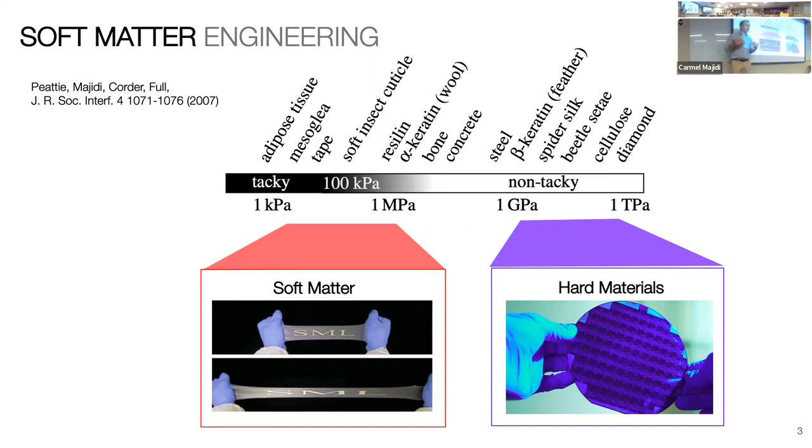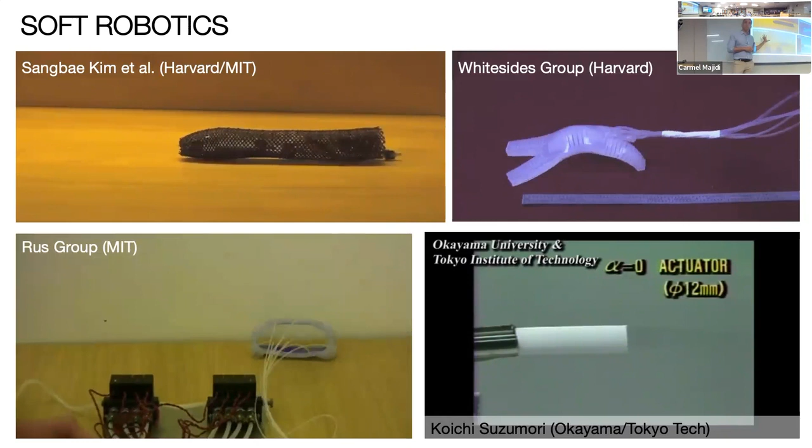So this is something that we generally think of as an important element of soft robotics. Ryan mentioned Rob Wood, who's really done a lot of really exciting work in this space, but there's plenty of others. Ryan himself has done a lot of really exciting research, and there's just been decades of work. Actually, you can go back to the 1950s and 1940s, and folks have been doing soft robotics work with soft materials, elastomers, using pneumatics, hydraulics. A lot of these concepts and material architectures actually in some ways predate a lot of the current practices and the field of robotics more generally. So a lot of rich history here, a lot of work to build on over the years.

And it's not just soft robotics. There's been also decades of research on all sorts of robust, deformable, skin-like electronics and sensors. Of course, Northwestern is the hotbed for a lot of this work. Really the gold standard in stretchable electronics is established here, with folks like John Rogers and Huang and others, with these more deterministic architectures using wavy and serpentine ultra thin film electronics, but also a lot of really exciting work with nanomaterials and soft composites.

I'll talk quite a bit about our work with using liquid metal, and then also with hydrogels. I'll touch on some of the efforts, not just with ionic hydrogels, but more recently electrically conductive hydrogels that expand the range of options for stretchy electronics and sensors.

And then tying into some of the strengths here at Northwestern, again, not just on the stretchable electronic side, but obviously on the haptics side as well. The work done at Colgate and others, really pioneering novel material architectures, material systems, and using those for haptics and human machine interaction. So this represents another really exciting area where there is that continued potential for soft materials engineering.

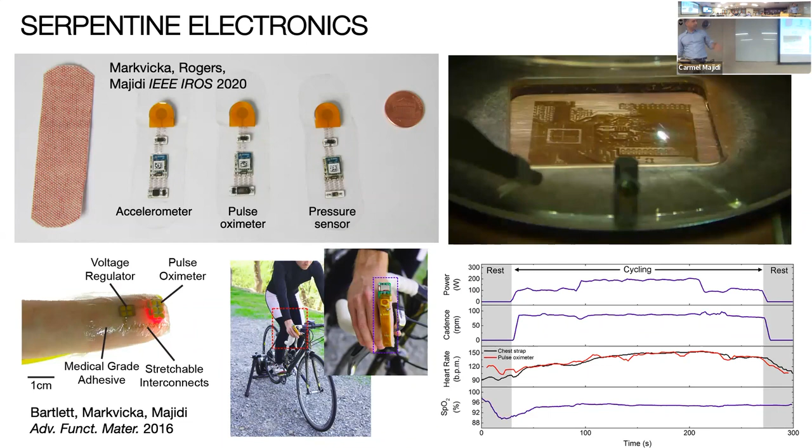In my lab, we just found that simple UV laser micromachining is good enough to create a lot of these same systems. Granted, at somewhat of a larger length scale, but still small enough that we can directly interface with pretty much any kind of surface microelectronic chips or sensing components that we need for different types of wearable applications. So this is just one case of a finger-mounted pulse oximetry chip in this video. Sorry, it's a little bit dark here.

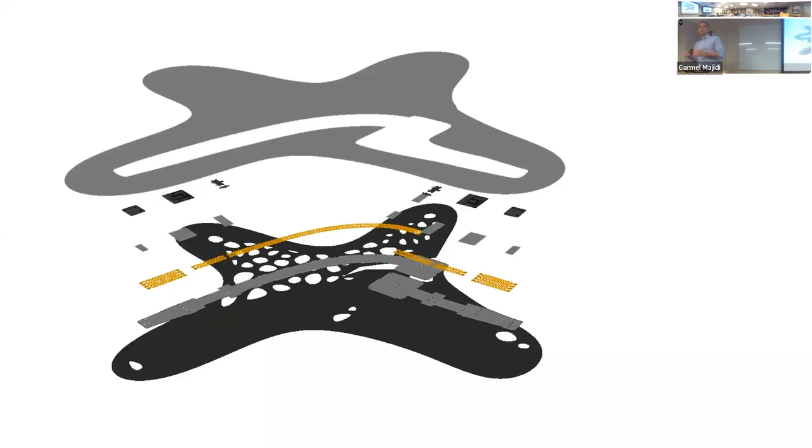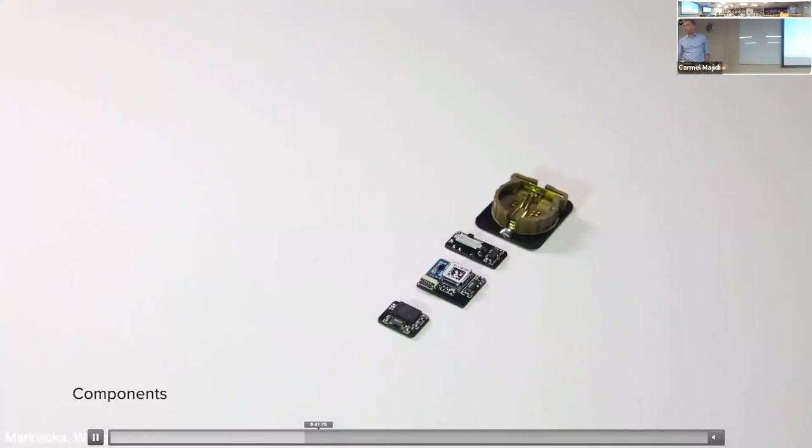But this is actually work quite a few years old now with Lining Yao in our HCI Institute, who developed a software interface to allow non-experts to go in and design some of these wireless sticker-like technologies that use these laser patterned serpentine interconnects to do multimodal sensing on the body. And so I'll skip ahead here in this video just in the interest of time. What we can see is that we can actually produce these using rapid prototyping techniques and create these customized stickers in under an hour.

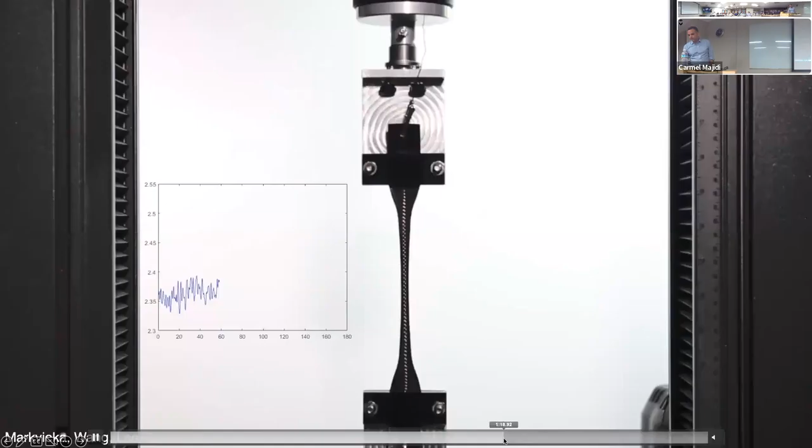And they're fully wireless. We can incorporate Bluetooth just like you would with any kind of standard IoT device or wearable. And this particular use case is a pair of IMUs, so you can do joint angle sensing. Maybe a little bit easier to see on that monitor than the projector, but the next clip just shows you just how robust and stretchy these serpentine interconnects are. So this is obviously well known, prior to us working on this. But what we show is just that, once you have a rapid prototyping method, you can achieve all sorts of different sensing modalities just using these surface mounted commercial chips. So acoustic sensing, IMUs, pulse oximetry, temperature, pretty much the works there.

So, very promising approach. Still, I'd say it represents the gold standard and probably the most mature approach to creating stretchable electronics. But one of the challenges, of course, is that, when we say deterministic, you actually have to engineer that patterning into these materials to get that stretchability, right? And so what these materials are lacking is that intrinsic compliance and deformability that you truly need if you want to have something that really matches the mechanical properties of soft biological tissue at all the different length scales, right? So I'm not going to get into all the downsides and challenges, at least for us practically working with these laser patterned electronics, but needless to say, there are cases where we want to shift to these other material systems.

So with these particle filled composites, again, this is another really rich area, fairly mature at this point, and over 100 years old. I mean, back to, actually, the turn of the last century. Folks were taking carbon black, carbon powder, filling it into rubber, achieving percolating networks that had electrical conductivity to get all sorts of soft rubbery conductors. And so if you use carbon black, the conductivity is not quite enough for digital circuitry, but it's enough if you want to have capacitive transducers or resistive transducers to do some basic, say, touch sensing. This is work we did with Jürgen Steimle and a few others years back on using these as little tactile interfaces.

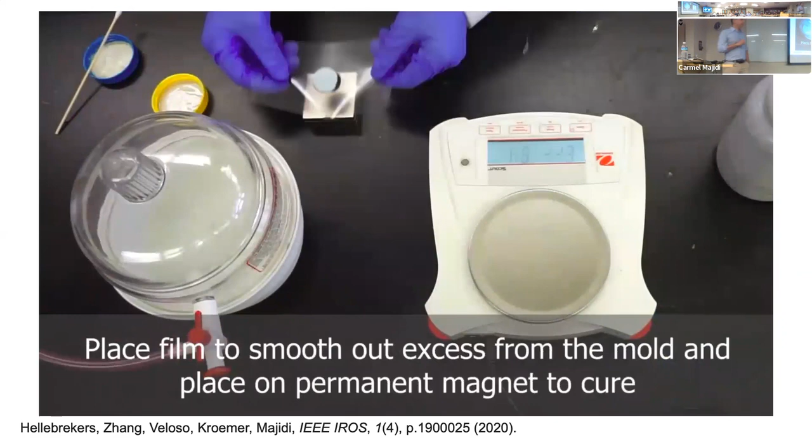So this is still ongoing. Tess has continued to work on this project. She's actually now at Meta AI, and I have another PhD student right now who's a Meta fellow who's continuing to work on this technology. This video here just shows you some really basic use cases of it.

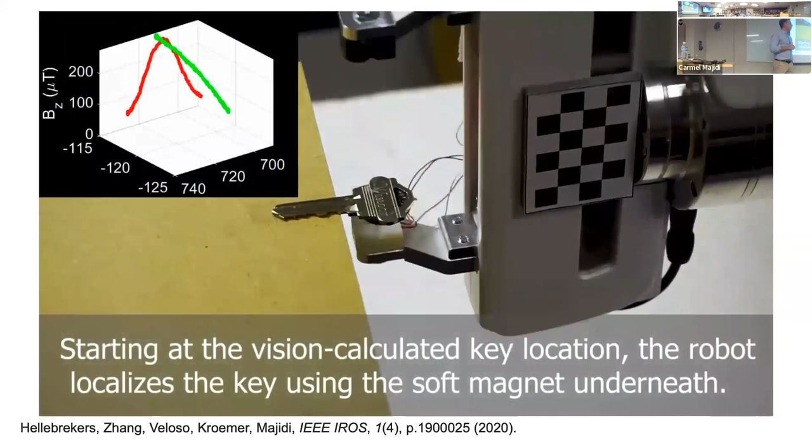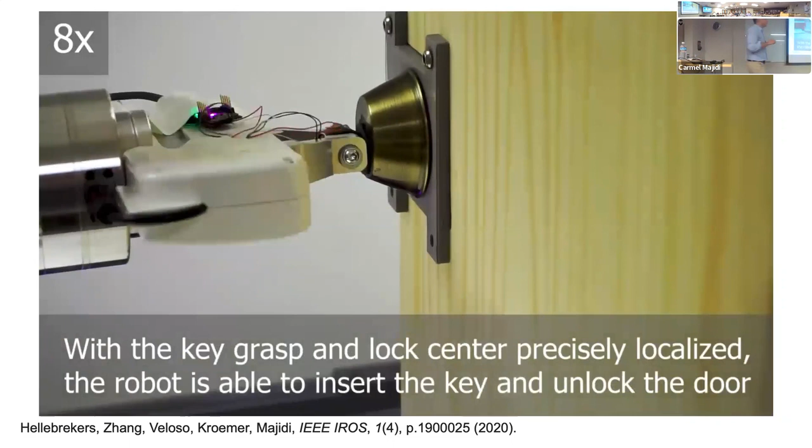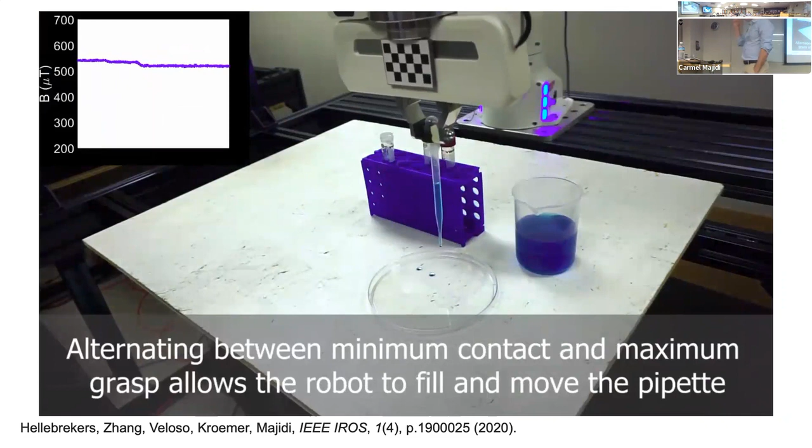What's actually interesting is, because it's kind of based on magnetic field, we can also use these sensors for proximity detection as well. So if you have the magnetometer, say, on the robot finger, and if you have this magnetic skin on the object that you're trying to interact with, then you can actually not just detect pressure during contact, but also detect the proximity as well.

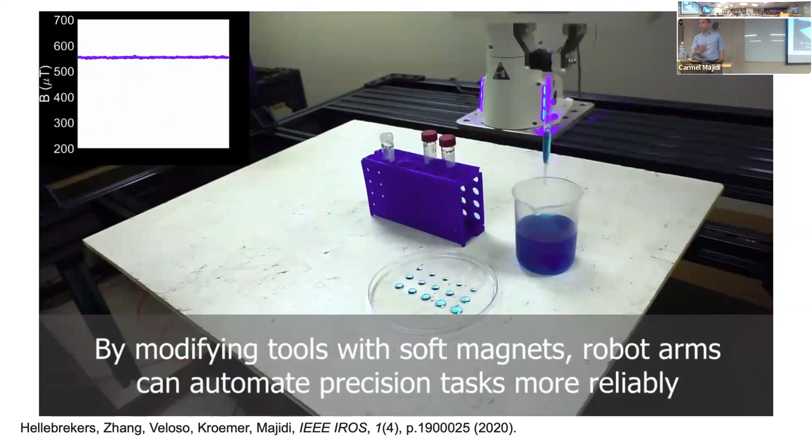Here's just an example of using the skin to modulate the pressure to get different droplet sizes out of that pipette. And then the next video here, and again, sorry I'm going through this so quickly. I just want to touch on a bunch of these topics. So definitely stop me if you have questions.

Yes. So capacitance sensing also works non-contact. I'm curious what your take is on the advantages of magnetic field versus capacitive, non-contact sensing? So yes, that's a great point. With capacitive sensing, at least the architectures that I know of that could do capacitive sensing over a continuous area with just a couple of electrodes, those can determine location. I'm not aware of any that can decouple the location and the intensity of the pressure, but I could be wrong about that.

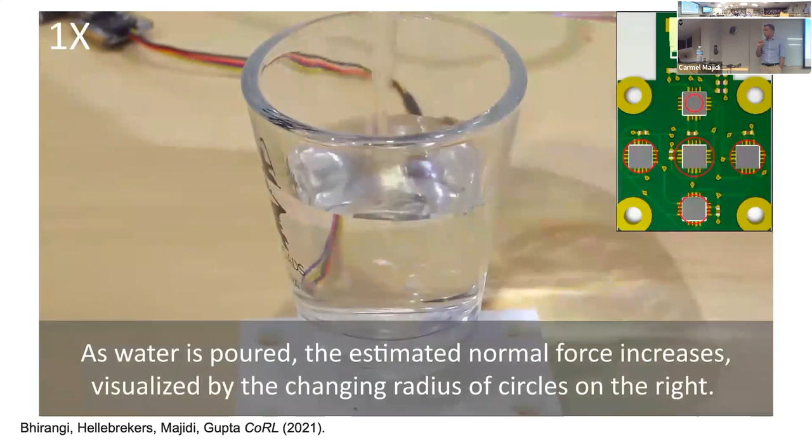Because there's also resistive sensing, these piezoresistive type mats, but those usually need column or row addressing to do that. So those require a lot more in terms of wiring. But certainly capacitive is good. I think if you're just trying to determine the location of the contact, you can do that with electrodes at the four corners of your surface, right? And usually that's good enough.

Let's see, I don't know if this, here it goes. So this video seems to be a bit choppy. So let me see if I can just play it in the edit screen here. I'm going to skip this video just because it seems it's kind of holding up. We can get back to it later if you guys have questions about the ReSkin.

But anyways, I think that represents another way in which we can use these particle-filled composites to achieve these capabilities that could be useful in robotics.

So I'm going to spend a few minutes talking about our work with liquid metal, just because I feel it does have this best of both worlds type of property, that it's a metal, so it has high electrical conductivity. It also has high thermal conductivity for cases where that's important, but it's a liquid, right? So we can incorporate it into rubber, either in the form of microfluidic channels or little microscale or nanoscale droplets, and it doesn't really interfere with the natural mechanics of that surrounding rubbery matrix.

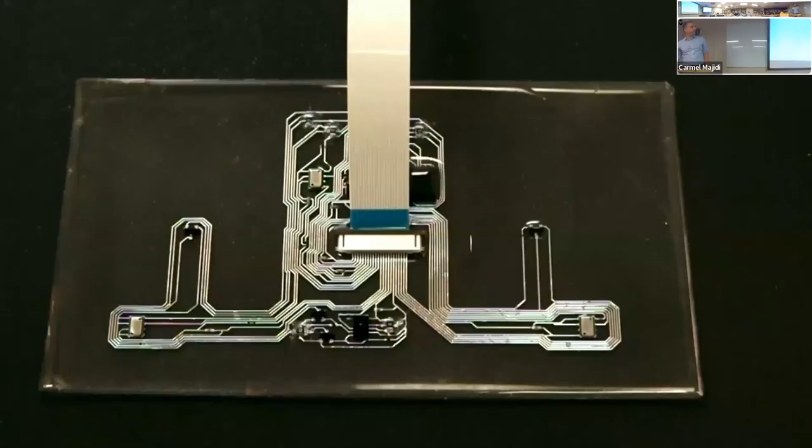And at this point, we have manufacturing methods and synthesis techniques where we can pattern and incorporate liquid metal into gels and elastomers or other soft matrix materials at all sorts of different length scales. And so I'll just quickly touch on some of the work that we've done with liquid metal based microfluidics and how we can use that for creating highly robust and flexible and stretchable electronics.

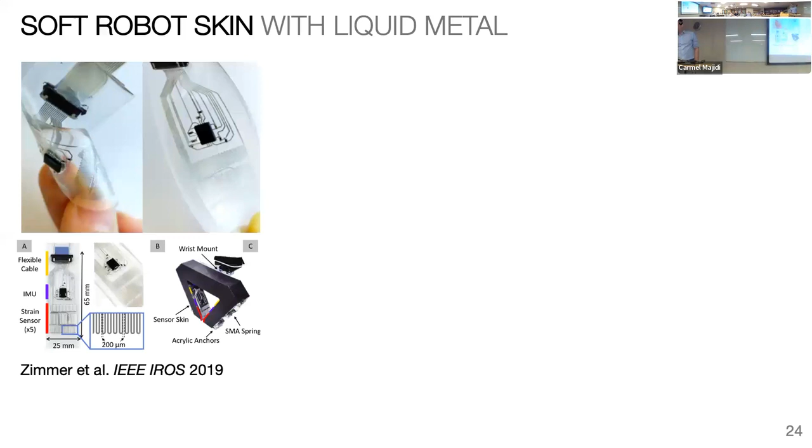This is a circuit made out of the liquid metal, directly interfaced with all sorts of microelectronic components for sensing, signal processing, and communication. Again, some of these videos might be easier to see on the TV display there. But here's one of our early attempts at using it as a sensing skin for a soft robot gripper.

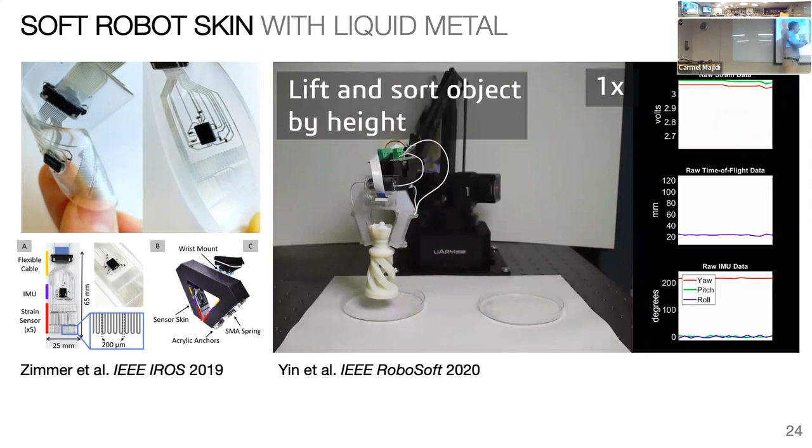So this is a simple two-finger gripper where we have a liquid metal functioning as a kind of a pressure sensing transducer, but then also using it for electrical wiring, for a time of flight sensor, for doing scans, also for connecting up an IMU for tracking motion orientation of the robot, of the gripper, I should say.

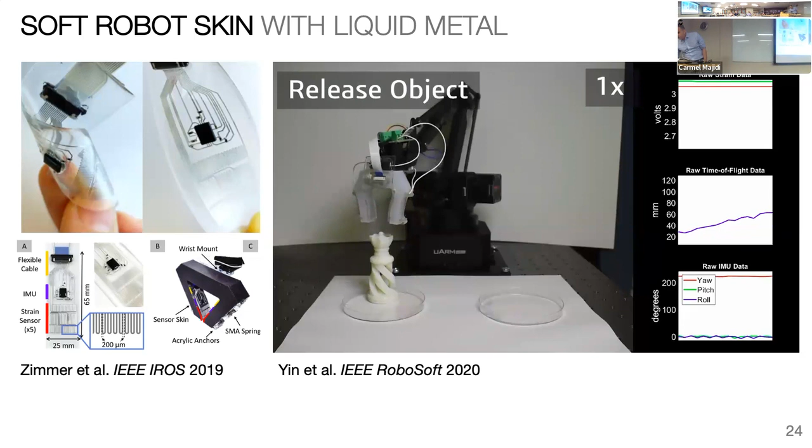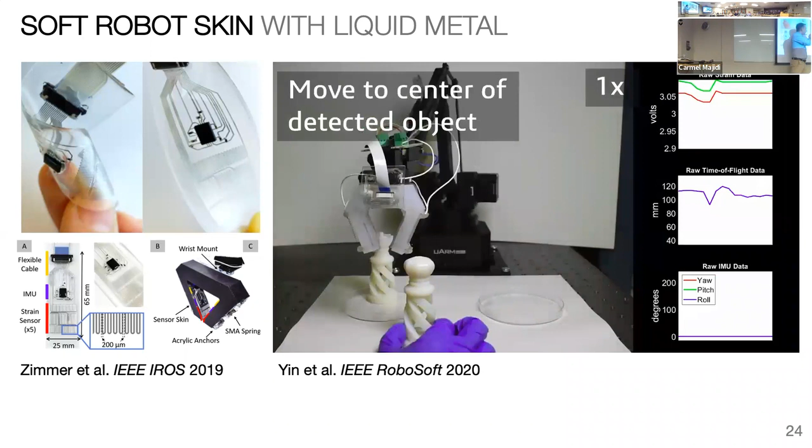And just in this next clip here, you'll see that by incorporating all this sensing, using a skin that is itself soft and rubbery and stretchable, it doesn't impair the ability of the robot to operate, and then it endows it with the sensing capability so it can be robust to any kind of disturbances.

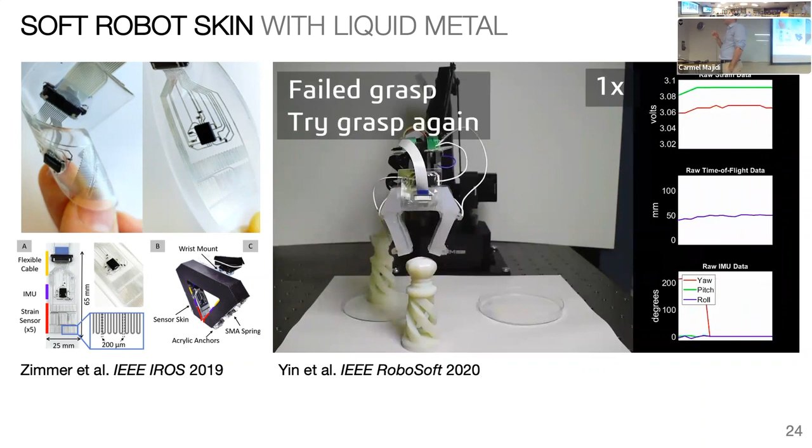So like for this case, if we move the chess piece, that's something that was detected by the time of flight sensor. And then say if we interfere with the gripping of that chess piece, as you'll see here in a sec, that's detected by the liquid metal pressure sensors. So again, using that onboard sensing, relying on more than just computer vision or a camera to give the robot some degree of autonomy so it can complete a task.

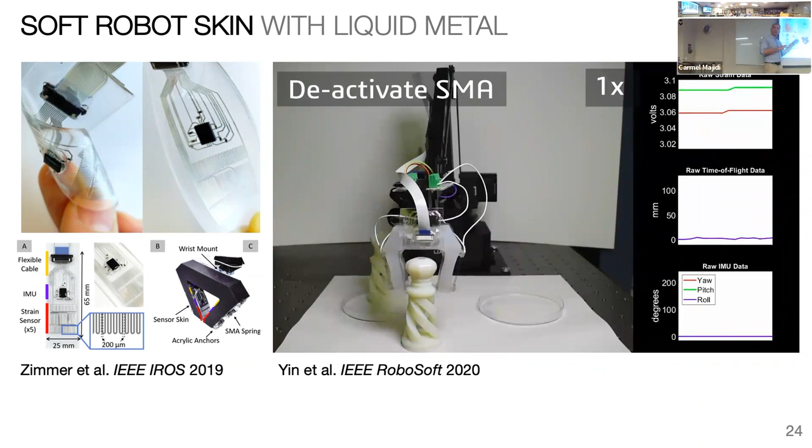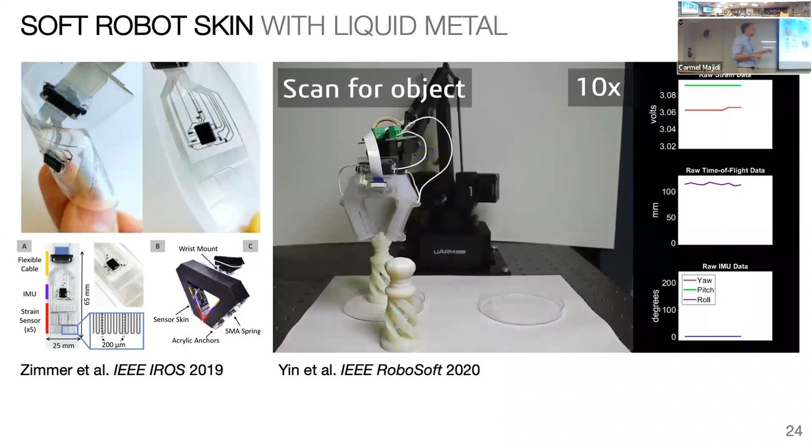All right, so that's almost state of the art, where we are with microfluidics. Pretty much anything is possible if you're talking about these simple strain sensing or pressure sensing applications, or if you're looking at using these for stretchable circuitry. Anything more complex really relies on the multifunctionality of these composites, where instead of fluidic channels of liquid metal, we have these microscale or nanoscale droplets suspended within the rubber matrix.

And so this is one of the architectures that we discovered a few years back, where we found a really rich and unique combination of material properties. So combining the innate native mechanical properties of that surrounding gel or polymer with metal-like electrical conductivity, thermal conductivity, and also endowing these polymers with enhanced fracture toughness, and in some cases, the ability to self-heal and repair themselves. So I'll touch on that a little bit later if there's time.

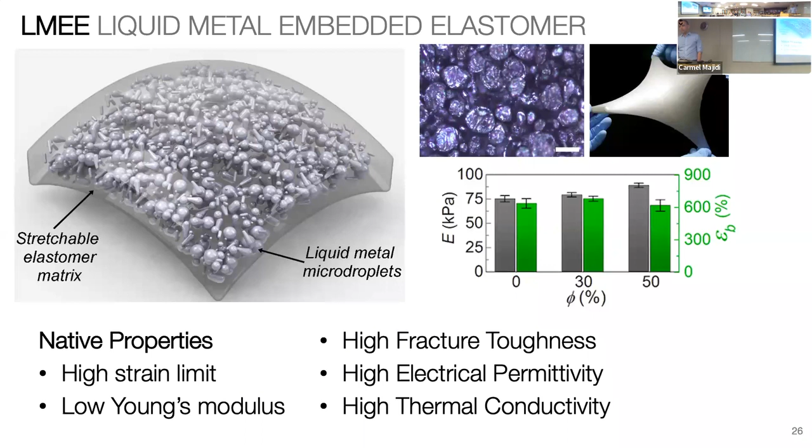All right, so in some cases, we can load up these polymers with 50% by volume liquid metal droplets. That's what you see here. We can actually go up to like 60, 70, even in some cases 80%. And so in a lot of these cases, it's actually mostly metal. So these materials are quite dense, quite heavy, but because the inclusions are liquid, the composite's still quite soft and rubbery. And so we can have these materials that have really enhanced thermal conductivity.

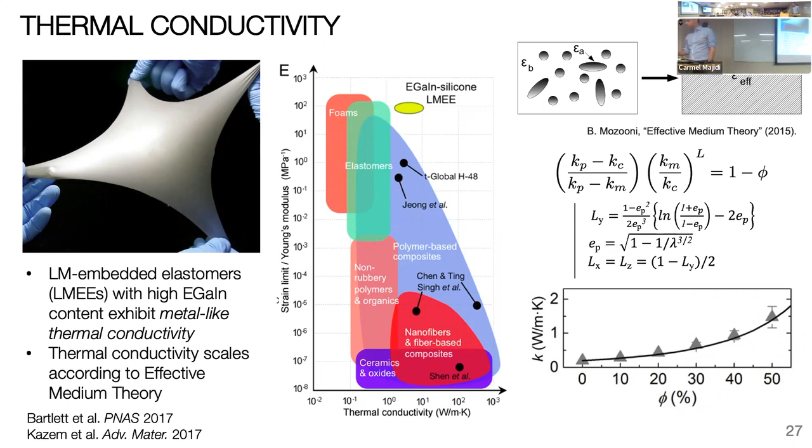I won't have time here to get into the underlying physics of these systems and how the thermal and electrical properties can be predicted using principles like effective medium theory and other principles in mechanics or physical mechanics. But the thermal conductivity itself is important.

If we want to use some of these soft material systems for applications like wearable thermoelectrics, so if we want to do active heating or cooling on the body, on skin, if we want to do thermoelectric energy conversion, so if we want to actually convert body heat into electricity, well, it turns out that these liquid metal filled composites do a much better job in terms of allowing heat to flow in and out of these thermoelectrics so that they can operate.

And so, with these composites, I won't get into this, but we can also 3D print them using just basic extrusion-based techniques, and we can even create these 3D architectures to create little heat fins and things like that to further improve thermal performance. And so this is just one example. We've had a few publications just on the thermoelectric device itself, and we have this current study here where we're still wrapping things up.

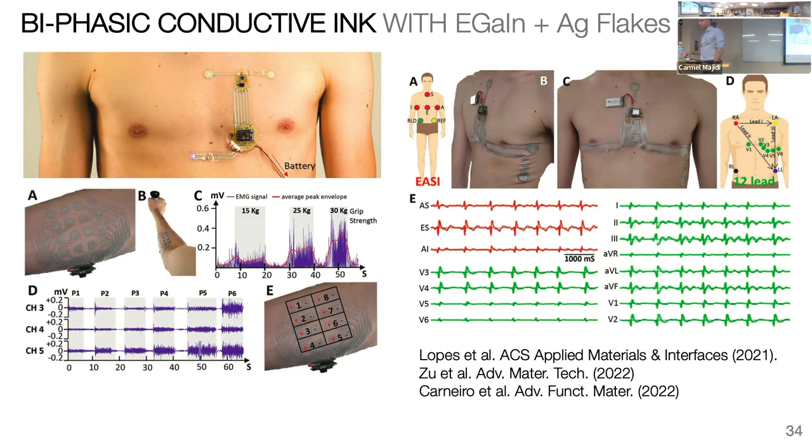So I do want to move along here just because I did get off to a little bit of a late start, and I want to make sure I get to the soft robotics content. So the gel stuff, I'm just going to skip through.

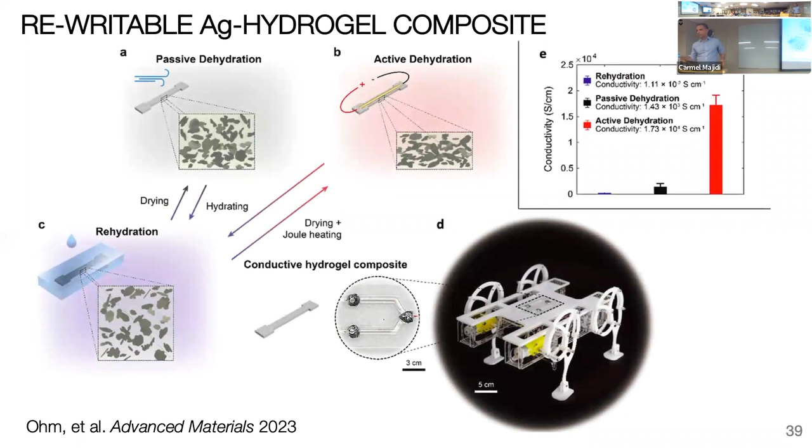Bottom line here is that there's cool stuff that we can do in terms of making soft batteries with gels. We can also make systems that are even more compatible with the body, if we want to make these soft bioelectrodes, when we use gels as the matrix material. I'll let this video run a little bit. This is a fun example of using the gels and actually reconfiguring their conductivity.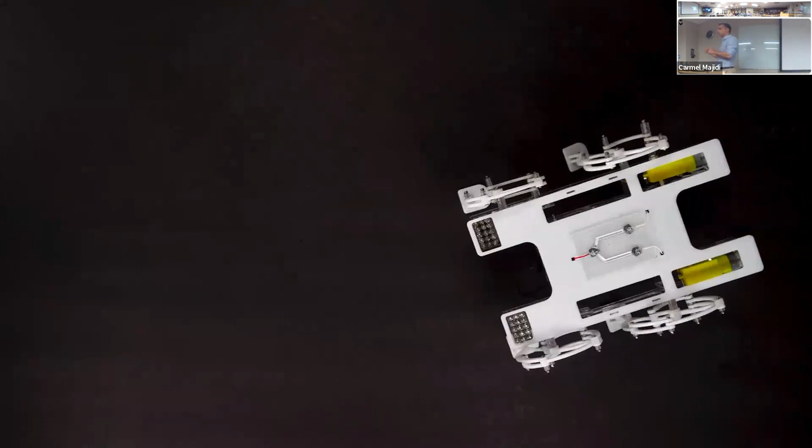The nice thing about gels, as opposed to say a silicone rubber as our matrix material, is now we can use hydration and dehydration to increase or decrease the conductivity in a reversible way. So here we're decreasing conductivity for the wiring to the motors on the left, and you see the motors on the left side don't move quite as much. And now we're going to dehydrate the connection, the motor neuron, if you will, on the right, and you see that those motors now won't move quite as much.

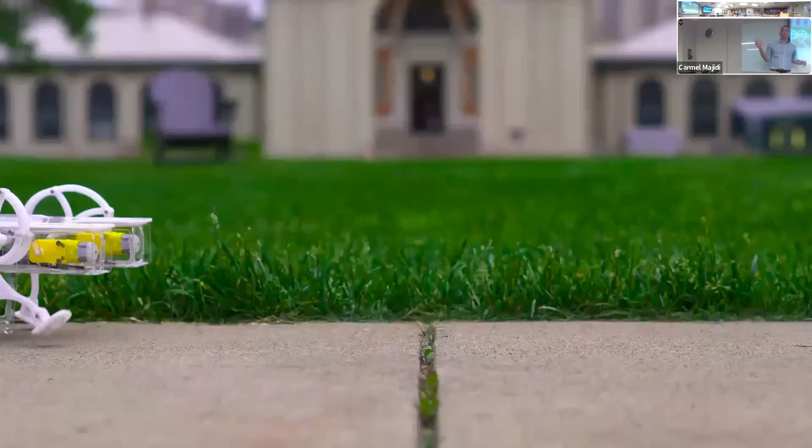So these are some of the emergent properties that come just by virtue of shifting from your typical printed circuit boards to these soft, gel-like materials. And you start seeing behaviors that in some very loose way start to mimic the properties of natural nervous tissue and its neuroplasticity and reconfigurability.

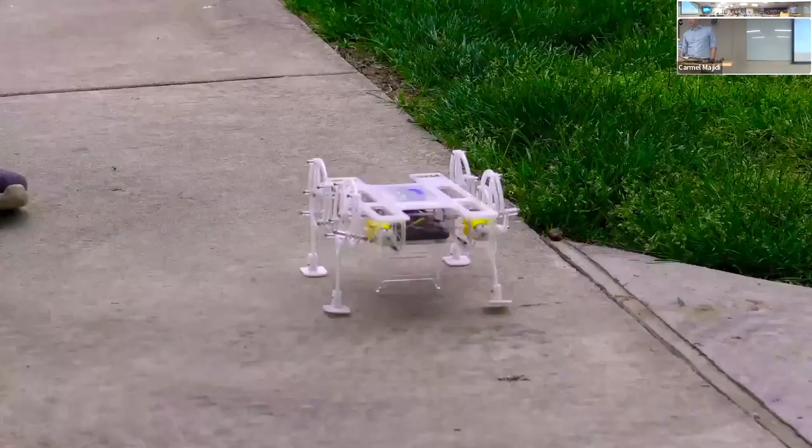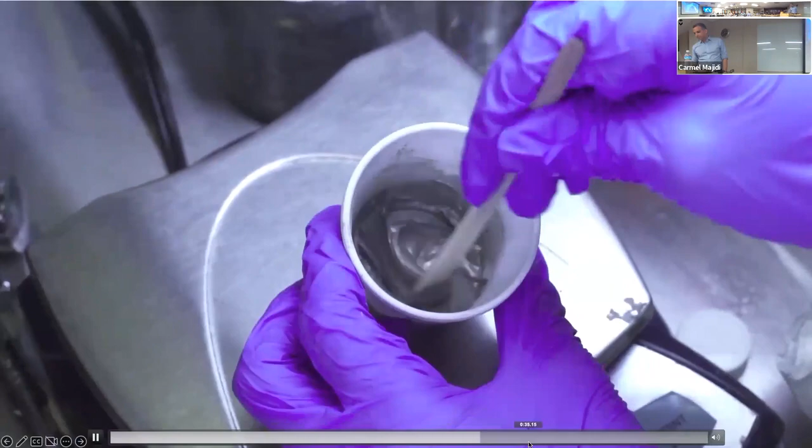And then I'll skip this. This is just another quick example here of a soft snail robot. Oh, actually, no, sorry. This is just a conductive gel that uses liquid metal, gel, and also silver flakes, and has this nice tacky self-healing property. So you tear it apart, stick it back together, the electrical conductivity is restored. The elasticity, basically material integrity, is restored.

So you see here, this is a real-time video showing our magic self-healing conductive gel connecting a motor with a controller. This is all just an untethered soft robot here. We cut at it. We don't fully sever it, but we cut it enough to reduce the conductivity. So the motor slows down, and then just simply by tamping on it, that basically gets the material to stick back to itself. So it kind of has this self-healing property.

So again, something that you just wouldn't get with your printed, copper-based PCB. So anyways, a fun project, and maybe useful if you ever need a soft snail robot. Okay, so I'm going to try to cram several students' PhDs into the next 5 minutes here. Again, sorry that I'm going through this so quickly, but

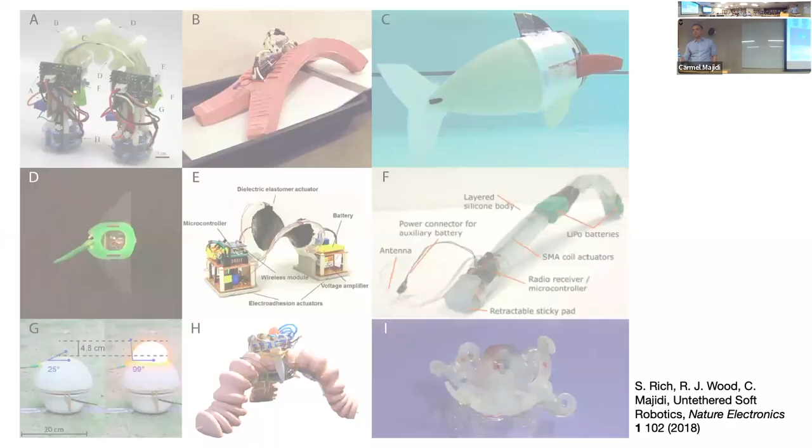I just touched on one aspect of soft matter engineering, right? Which is the robust electronics and the sensing and to some extent energy harvesting. But then there's a whole other question about how do we actually build fully untethered soft robots that are capable of dynamic motion. Actuation, of course, that's the big question.

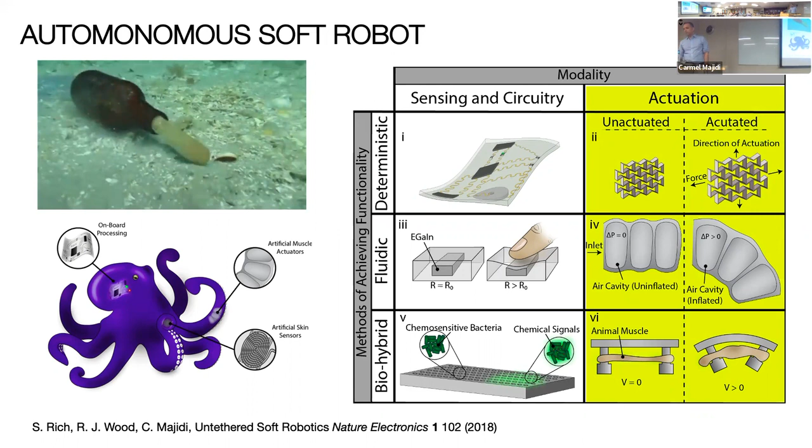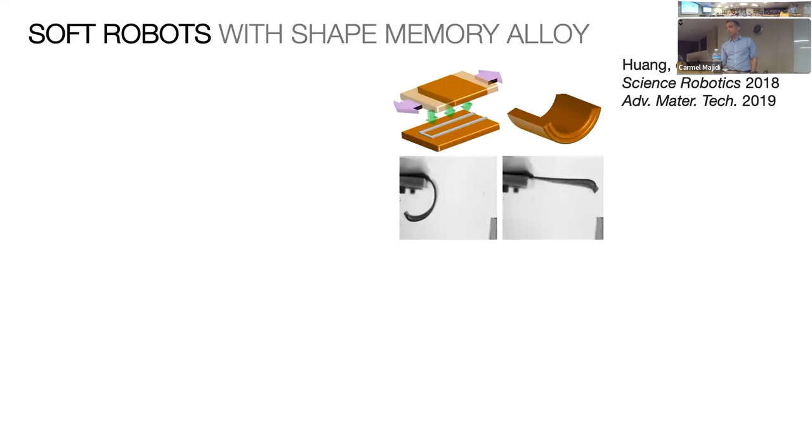And so this is something I'll just briefly talk about. And then also what are the considerations when it comes to actually achieving autonomy with these systems in terms of control, and how some of that could be guided by simulation. So again, apologies, I'm skipping ahead here. We're using shape memory alloy in place of pneumatics or motors, just because these materials have very high work densities and they can be quite compact and capable of pretty robust motion.

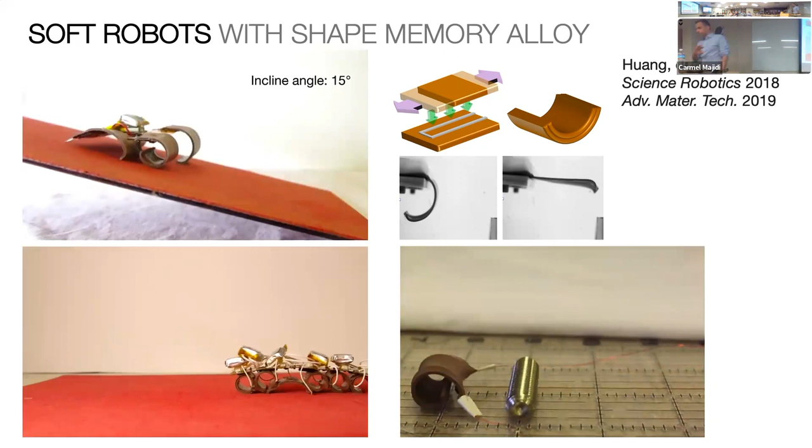So these are all real-time videos showing untethered soft robots that are fully powered using shape memory alloy actuators. This is for dry conditions. Here's just a few examples of these swimming soft robots. And if we put markers or QR tags or whatever, and we have a camera set up, we can also have it perform some really basic tasks like following a little ping pong ball in a water bath.

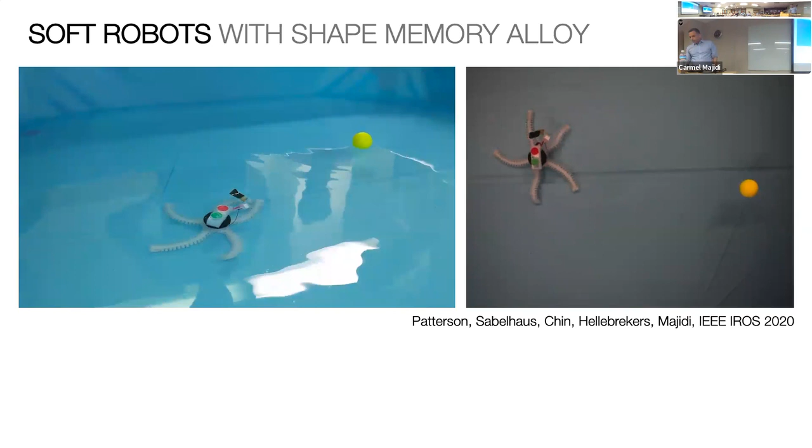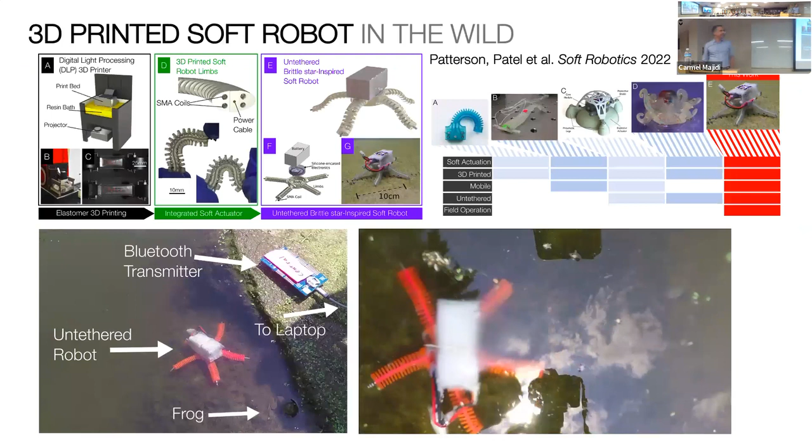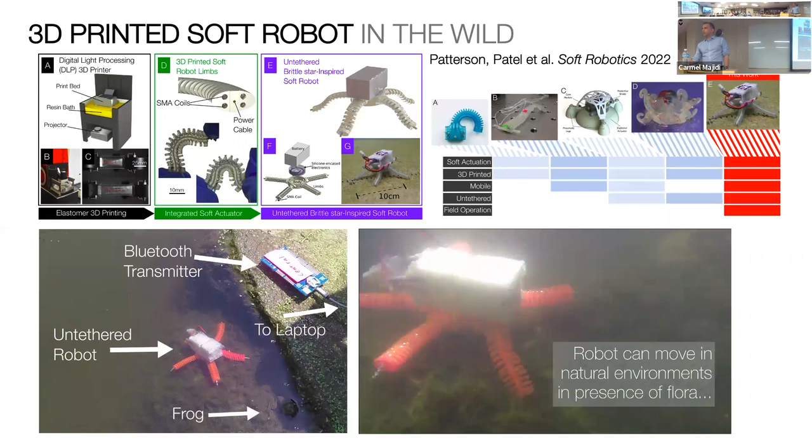So there's nothing too, I think, groundbreaking about these material systems. It's really just a matter of engineering them in a way that we can leverage those SMA coils to get these robots to move and operate within an environment and do so fully untethered, which is again a nice advantage of using SMA versus some of the other soft robot actuation techniques.

Something though that we found is that if we ever want to control these robots and do something useful, ideally we would like to do model predictive control. That would be, I think, the ideal. But what we found is to get there, it really helps if we have some good model and then some good way of simulating these soft robotic systems.

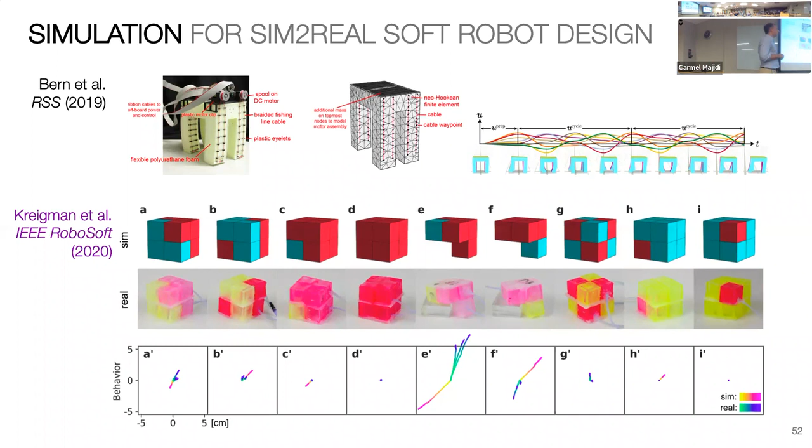So this is an area that Sam and then Josh Bongard and Hod Lipson, Daniela Rus, plenty have looked at. Stelian Coros and others have looked at creating these sim-to-real type representations for soft robotics and creating these physics engines for soft robotic systems. A lot of our work uses a practice in computer graphics known as the discrete elastic rod model.

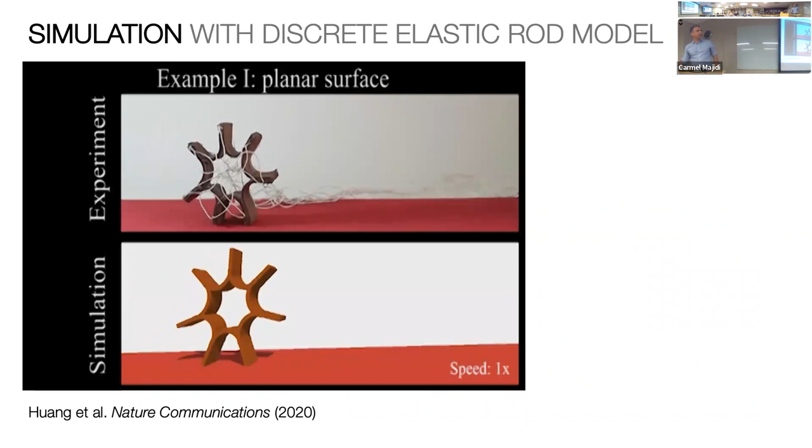So this is actually work that I adopted from a former postdoc in my lab who's continued to work on this. And so this is the work that we did together on building a soft robot physics engine that actually runs faster than real time. So the time it takes to actually generate the simulation is basically faster than the wall clock time of the physics that it's trying to simulate.

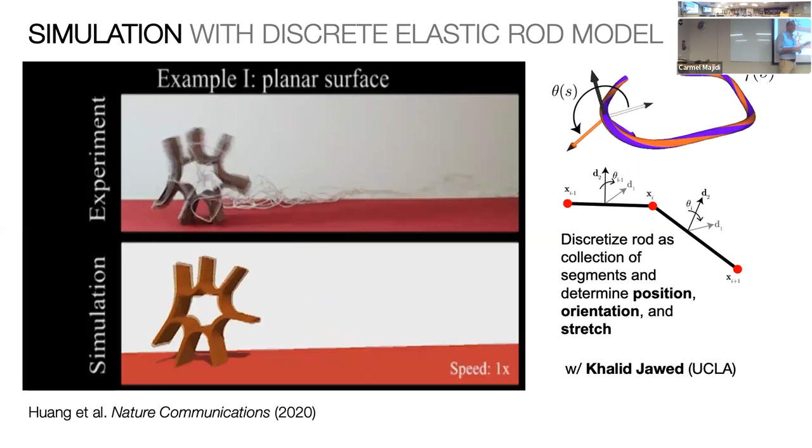And a lot of our effort has actually been in trying to experimentally validate those physics engines with some of our soft robot test beds. And so I don't have time to go through all the details here.

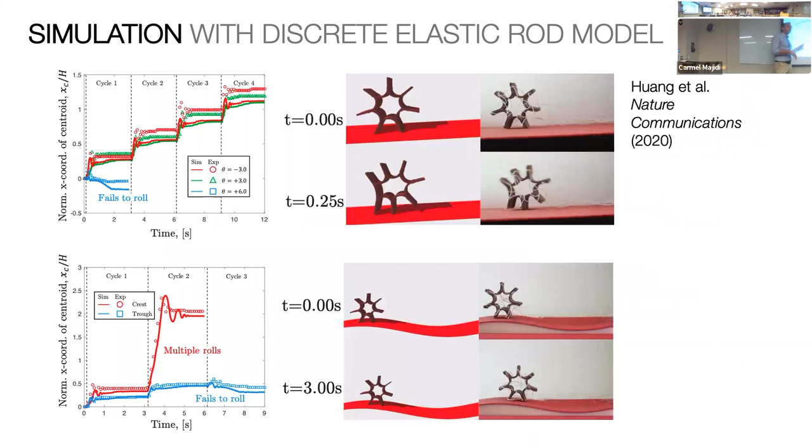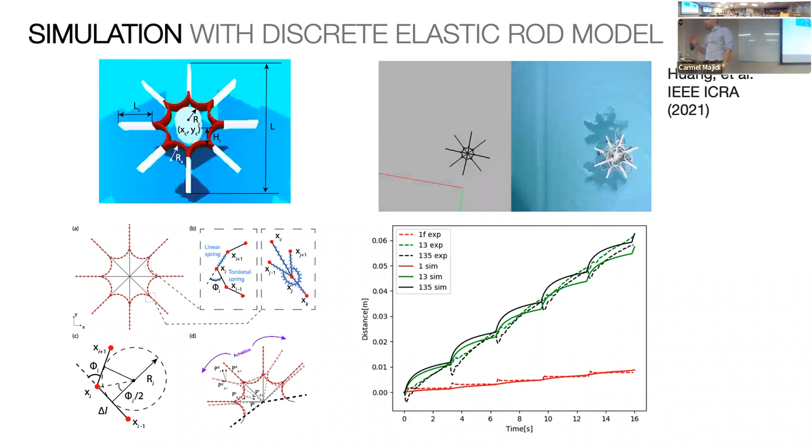But the agreement is actually quite good, not just qualitatively, but quantitatively. And so what that means is that now we can actually use the physics engine to start designing and controlling these robots and doing things like path planning. This is showing it now, applying that physics engine with a simple fluidic model, and again, doing these faster than real time simulations.

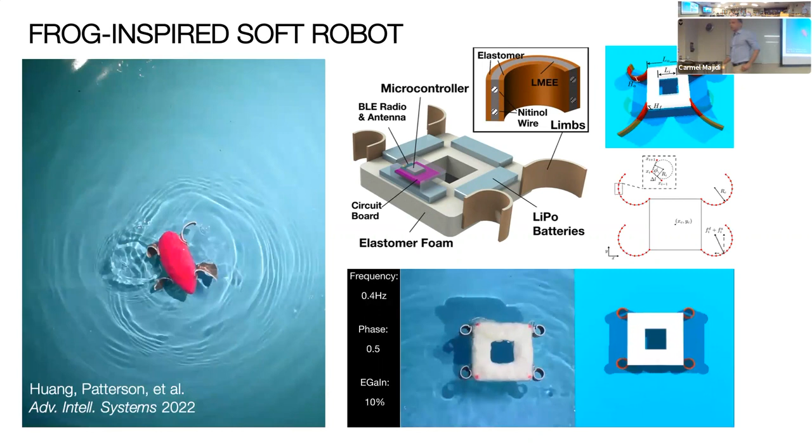This is one of our more recent studies, simulating these frog-inspired soft robots. And so now if we want to do something like path planning or trajectory following, instead of having to collect a lot of data on the soft robot, we just do everything in simulation. We generate this whole library of motion primitives, and we try to predict how the robot's going to behave in this fluidic environment if it moves its limbs in certain ways.

And so when it comes to showtime, and we ask this robot to move along a certain path, now it has this huge library of simulation-generated motions that it can draw from to decide, after every few steps, what it needs to do to correct its trajectory and get back on track. And so that's some of the stuff there.

Again, though, you can see that we're still using computer vision here to track. There's no onboard sensing. The robot has no sense of where it is in the world, right? We still need a radio to track its motion and send commands back to it. And so the idea now is if we can actually incorporate sensing into these soft robotic systems. That's something that some of my PhDs and former postdocs are working on.

Sorry, these videos for whatever reason are not playing. Let's see if I can skip ahead here.

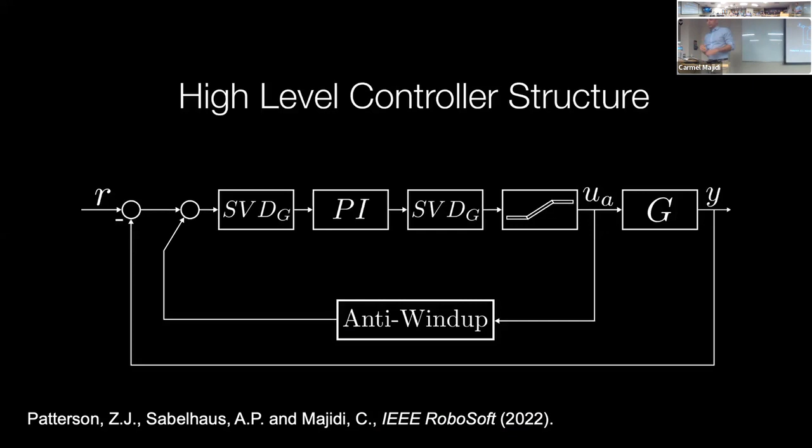So this is that same shape memory alloy powered soft robot limb, but now we put this soft bend sensor, and this actually uses the capacitive sensing that you were talking about. So, quite robust. It allows us to detect motion both in plane and out of plane. There's this anti-wind-up feature of the controller that we're using, something that Drew Sabelhaus, the former postdoc, introduced.

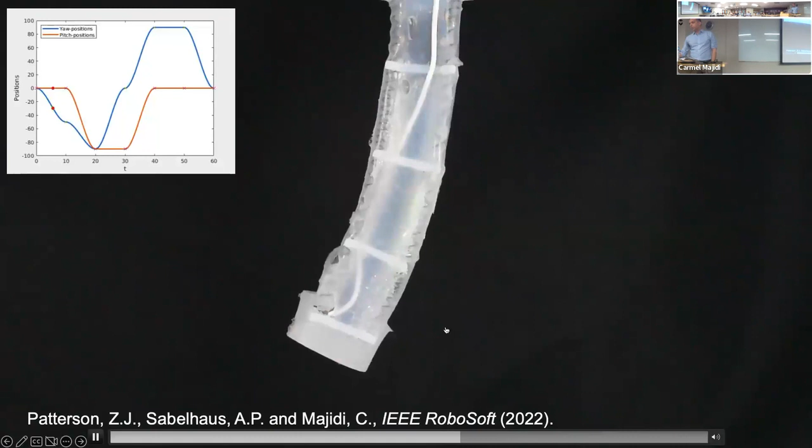But the ability to follow certain trajectories and use this feedback control is quite good, so long as we use that anti-wind-up to prevent the pulse width modulation from sending too much current to our SMA coils and causing overheating. So that's a big concern when you use these.

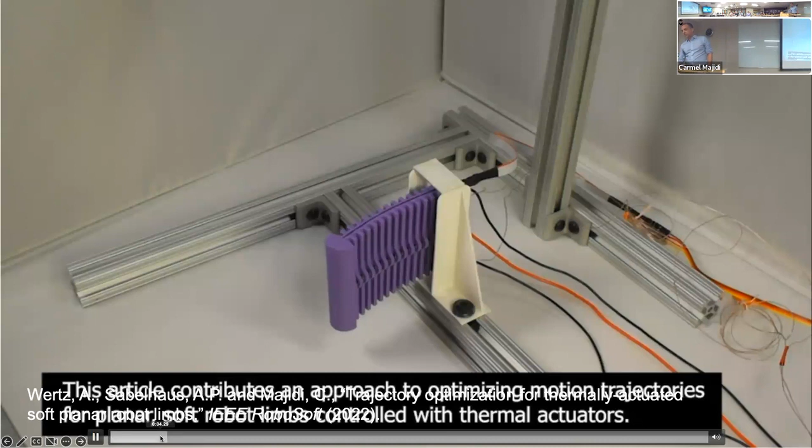Here's another approach based on trajectory optimization on a different kind of robot limb design. This is based on a model. So we have a desired trajectory, then we have the model generate what the commands need to be to those SMA coils to track that trajectory as closely as possible, and then we implement that on the robot limb.

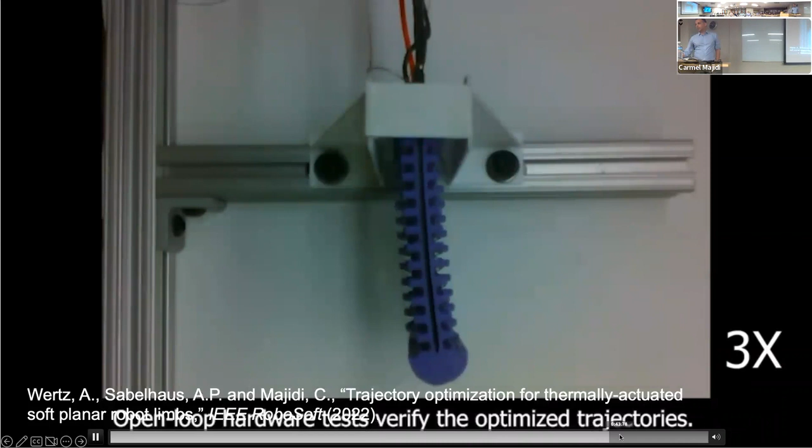Again, in the interest of time, I'm going to skip ahead. And the reason I'm eager to skip ahead is because I really want to share, before I wrap up, some of our work with liquid crystal elastomer, because this builds off of and is inspired by work that Ryan has done using LCEs, in this case particularly 3D printed LCEs, to create all sorts of interesting soft robotic systems.

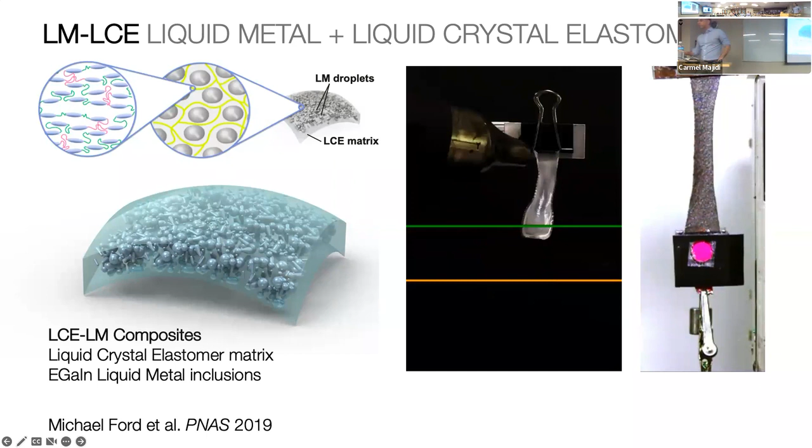Our contribution is to take those liquid crystal elastomers, those shape memory polymers, and incorporate liquid metal microdroplets inside to make them electrically conductive, so that we can make them responsive to electrical stimulation. And also, the liquid metal enhances the fracture toughness and the durability of these materials. So we can poke at these, cut them or whatever, and the LCEs still remain intact. We can still pass electrical current through it. And there are some other interesting emergent properties that I don't have time to get into.

The next step with this is to take architectures like this, or architectures that Ryan has developed, to create these soft actuators, soft artificial muscle that now use the embedded liquid metal, not just for the joule heating to activate these materials, but also for sensing, right?

So in this case, this is actually an example of a kind of self-regulating soft actuator where we can basically just track changes in resistance, then use that to determine when to send the next pulse of electrical current to the actuator.

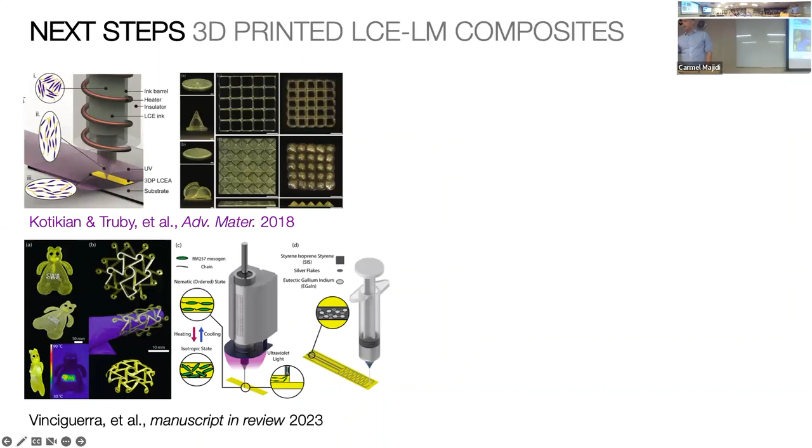And another example here is again following off of work that Ryan has done on 3D printing of these LCEs. See if we can use these to create more filament-based architectures. We can overcome some of the challenges with basically the heating and cooling of these systems, so we can do that in a much more rapid way.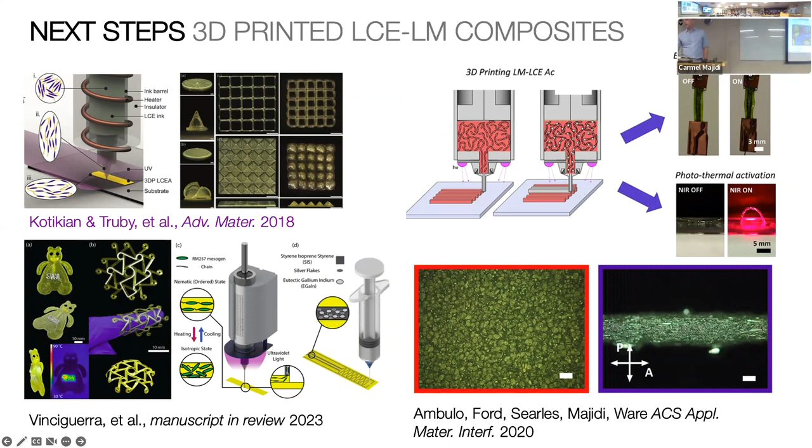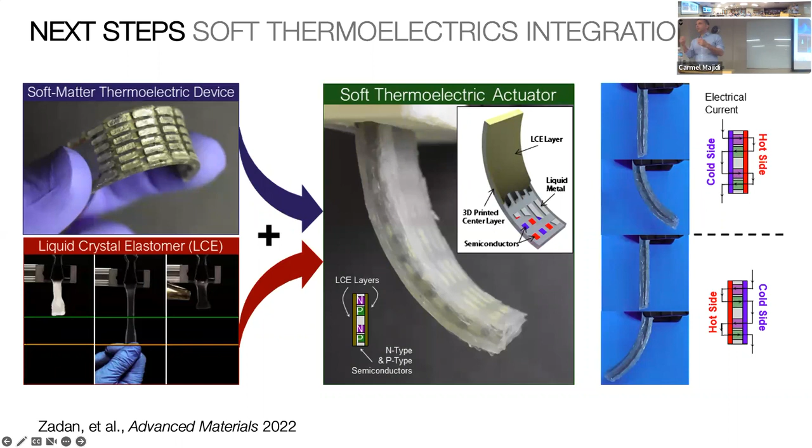And then lastly on this topic, looking at integrating the LCEs with the thermoelectrics that I talked about, so we can actually get more digital control on that heating and cooling, and not just rely on open loop joule heating and passive cooling in an ambient environment.

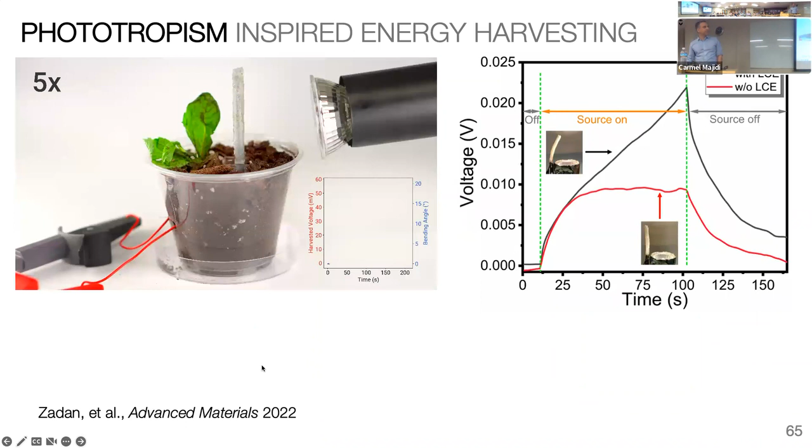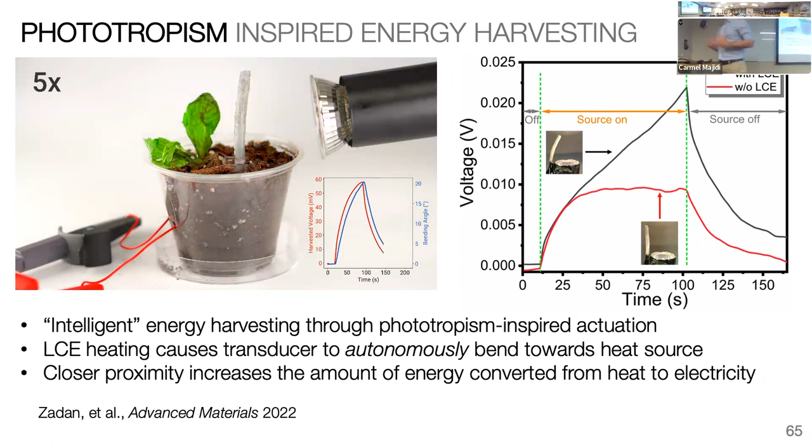So again, I'm short on time here, so I won't get too much into the details, but there are some interesting properties that also emerge when we start combining and mixing and matching these different functionalities, right? So if you start adding the thermoelectrics and its energy harvesting capabilities with the LCE and its actuation, shape memory type properties, you can create these materials now that can sense an energy source and bend towards it to harvest even more energy. So things arise that sometimes you don't get with more conventional material systems.

This is actually just the last couple of slides here, so you'll have to indulge me and let me just show these videos. But this is the weirdest thing that we're doing, probably the most exotic in terms of what could be possible with some of these soft actuator technologies. This is actually getting away from a lot of the existing paradigms of using electrostatics or joule heating for artificial muscle, and instead using electrochemical redox reactions to create a soft actuator.

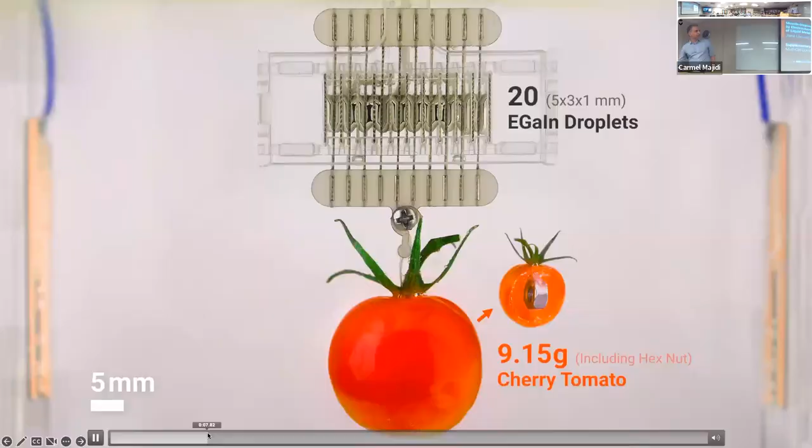And so, I unfortunately won't have time to get into the underlying electrochemistry here, but I'll just present this as a teaser. Basically, this is an actuator that pulls using very low voltage. And we can actually get reasonable work densities out of this, and those work densities increase the smaller we get these liquid metal droplets. And so by applying voltage using electrochemistry to perform redox reactions on droplets of liquid metal, we can basically get them to act like these little individual muscle cells that are capable of modulating the surface tension to create this actuator type functionality.

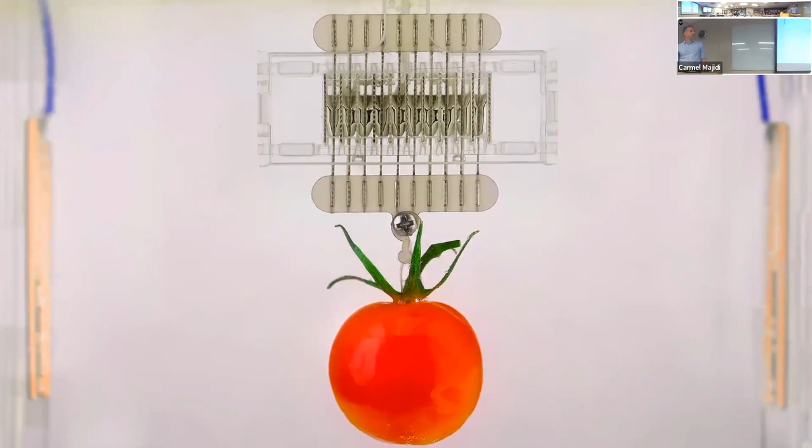So that's something that may or may not ever be practical for a robotics application, but still something I think might be worth exploring. So that's it. Where I want to go with this is to work with you guys on seeing if we can harness some of these technologies for robot hands and dexterous manipulation, right?

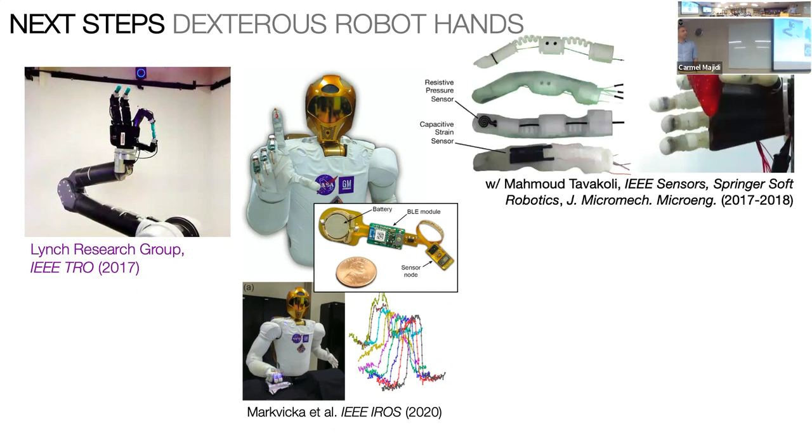I mean, you all have all sorts of exciting test beds and approaches to looking at, say, in-hand dexterous manipulation, for example. Some of the work that we've been doing on creating these sticker-like electronics might be able to be used to augment the sensing capabilities of these robots. That's certainly one. Using different types of soft materials, and also we've had some recent work with Nancy Pollard on some more foam-like hands for creating soft robotics. So I'll actually just close with some of that work that she's done.

So in any case, I really do again want to apologize for the late start, and that means we only have a few minutes left for Q&A. So thanks, and I'll take any questions. Any questions?

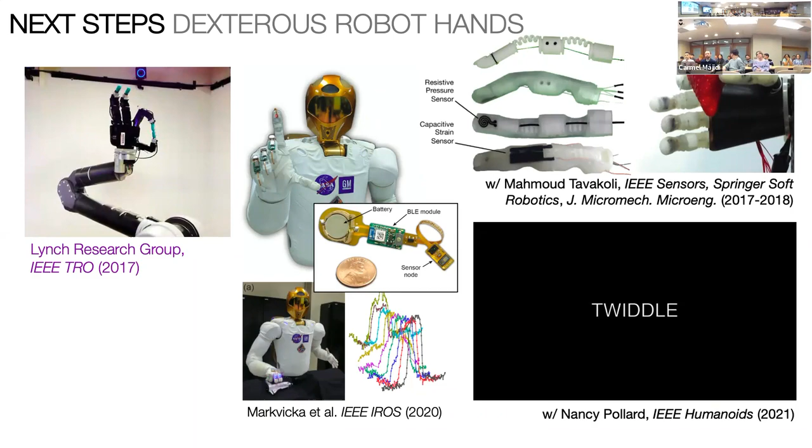It's about 10 times higher surface tension than water, right? So about close to a joule per meter squared, which is pretty extraordinary. And then by applying a little bit of voltage, we grow an oxide skin, just a few nanometers, right? What that does is basically kills the surface tension. It goes from like 0.7 joules per meter squared down to virtually zero.

What governs the rate is how fast you can grow that oxide layer. It's just the time it takes to grow and then dissolve that oxide skin. But the oxide skin, like I said, is only like a nanometer thick. Yeah. So quite fast. So is it fouling over time? Basically, will it exhaust its ability to generate the substance? No, so long as there's oxygen in the environment, it's not going to do that.

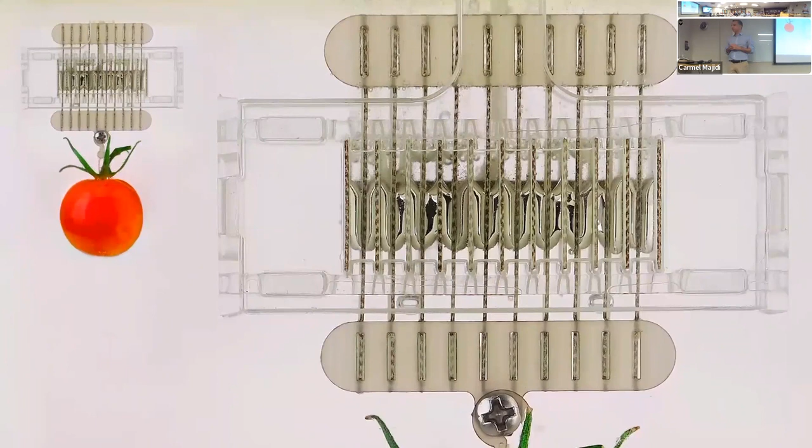Lots of bubbles rising. Yeah, so to get in the reduced state, we have to play around with the pH. We're using potassium hydroxide. The problem is we have an aqueous solution of potassium hydroxide. There's electrolysis going on. Even though the voltages are low, they're still just high enough that hydrogen and oxygen bubbles are forming. So that's what you see there.

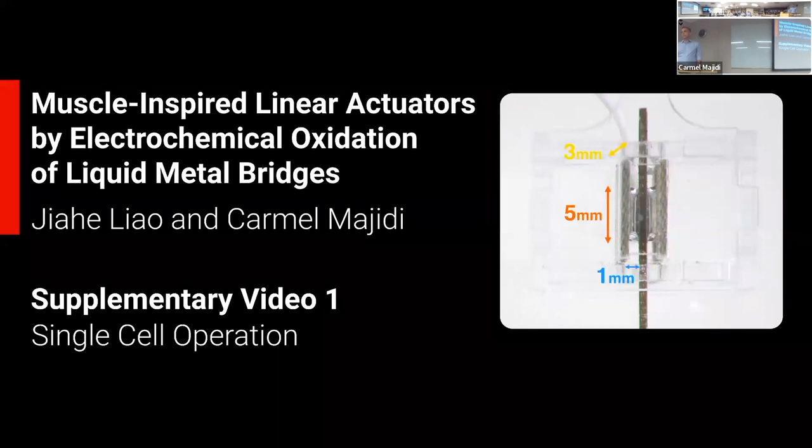And surface tension tends to go with not just area, but, well, I guess in this case it's area. So having it parallelized would help further, to have lots of little, almost bubbles. Yeah, if you go down to droplets, because it's like the perimeter to volume ratio, the smaller we go, the larger those ratios are, so it definitely helps. So in principle, if you got these down to a sub-millimeter scale, I mean, they're already quite small, but if you got them even smaller, then I think it could potentially be viable for some actuator applications.

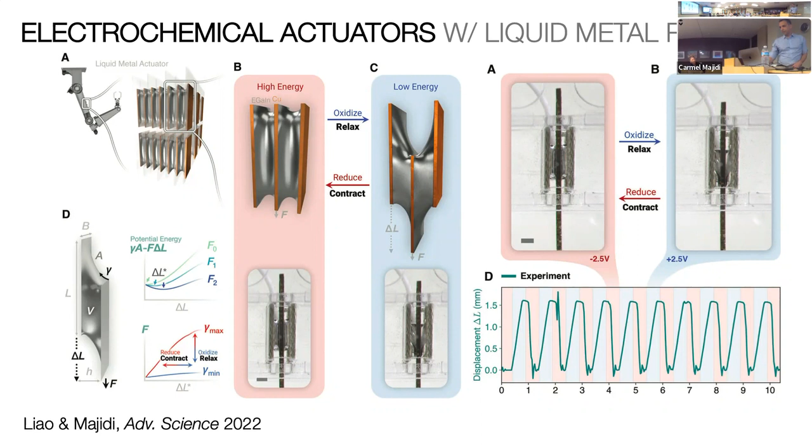So, global warming is going to cause a need for clothing that is cooling, and I'm curious whether any of your devices that generate electricity from heat also cool at the same time, or are they separate? They do, yeah. I don't have any videos, but I'll show you a quick slide of the cooling performance that we get. This is something we haven't published yet, and unfortunately I don't have a scale bar for what these temperatures correspond to. But I forget off the top of my head whether it's 5 degrees C or 10 degrees C, but it's very noticeable, the cooling that you get.

The performance that we're getting with these soft thermoelectrics is equivalent to the rigid thermoelectric devices, but the fact that it's soft means that you can have very intimate contact with the skin, so you'll get much more of that cooling sensation.

I see the survival suit of the future. That's right, yeah. Post-apocalyptic future, right?

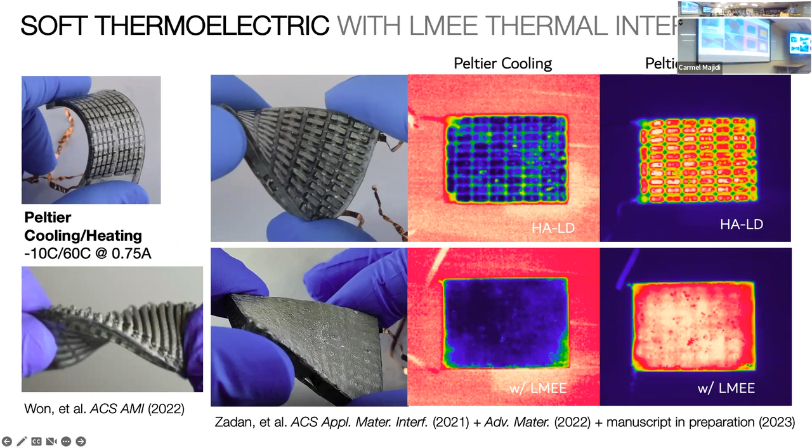Can I ask you a question while you're on the slide? Sure. Mechanical sintering is kind of easy to work with when you're talking about sensing in high deformation. Do you have to mechanically sinter these in order to get them to conduct heat well? No, we've gotten away from mechanical sintering. We have this new formulation here, so it's conductive as it is. Using the silver? Yeah, in addition to the liquid metal droplets, we put silver in there too. Not so much silver that it degrades the stretchability, but just enough to bridge the gaps between the liquid metal, so we can get that percolating network.